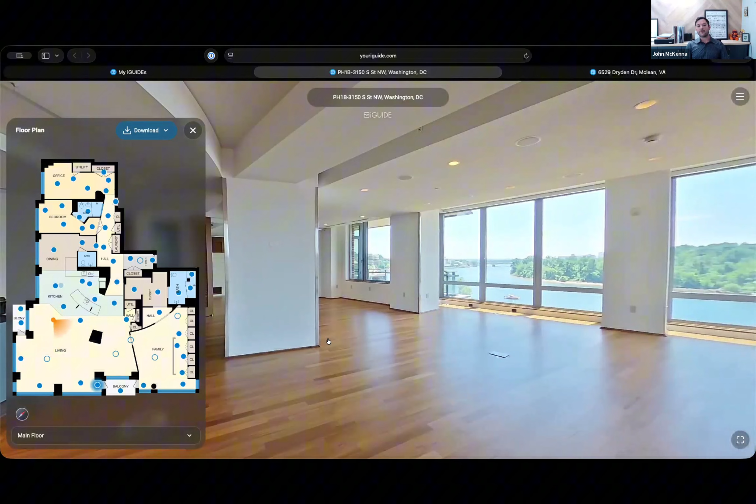Yeah, so we pretty much let everyone know up front our process. We'll get out to a job site based on our availability, and as soon as we get our initial scan package from iGuide, we share that PDF document and the iGuide link. We'll reformat everything, make it user friendly, and drop it into an email template, and let them know our follow up from there is the existing condition drawings going onto our template.

I'll switch screens here real quick, and just as an example of this project - got too many things open. Let's go to, here we go, Bluebeam.

This is the floor plan of that same model, dropped in with very little modification from what iGUIDE generates in the Revit piece, put onto our standard title block and templates. You can see, most importantly, the RCP and details we didn't have, and we'll go based on project scope from there into demolition and proposed drawings.

The existing condition drawings come in based on availability, about a week or so afterwards. We let the client know it's a great touch point for us. They see us on site, we give them the initial data from that camera, then they see our follow-up once we have the existing condition model generated. It's a way to show you're engaged and working on it as you progress through the beginning design process.

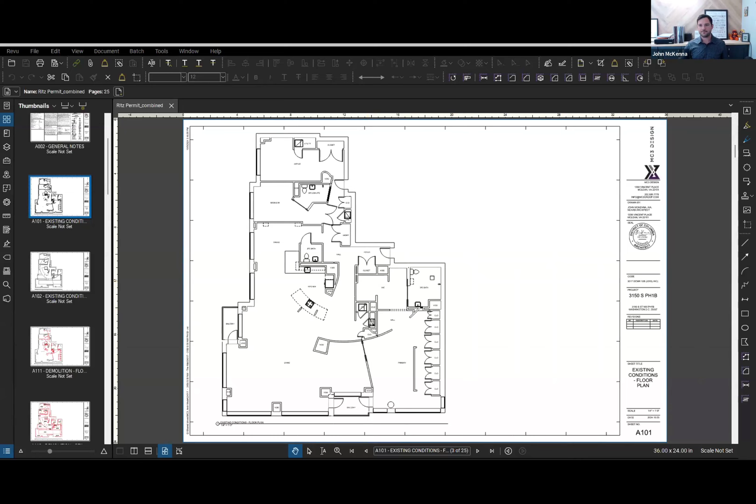Exactly, yeah, amazing. If anyone has questions, feel free to put them in the Q&A or chat. What I thought would be good next is to touch on our deliverables a little bit—essentially the variety we have in the AEC space, some details, and the level of development we use as well.

But first, John was asking about measurements or dimensions in some of your pieces, on the existing condition. That's a very good question, based on jurisdiction. We're in the DC area, so DOB is notorious for some challenging pieces on accessibility, so our existing conditions do not show dimensions, only our proposed drawings do.

Mark was asking, are you producing your own Revit models, or do you use ours as a starting point? Correct, yes—we get the generic walls and pieces from iGUIDE, populate that into our own Revit template, and manipulate from there. Depending on project scope, we may start at a schematic design level simply using the iGUIDE model, but as we develop floor assemblies, families and systems, our standard template takes over from there.

And maybe one last question from Bernard before we move on: what's the greatest challenge using iGUIDE and how do you adjust for that? That's a good question.

Limitations would be line of sight—you pretty much have to be able to access an area to scan and model it, same as manually measuring. But if you're building a model off of it, I'm not often the one on site scanning it, so if I'm drawing it afterwards, I need to be aware of what was scanned and what wasn't, and how to fill in those blanks. The LiDAR isn't going to capture something behind a door, or if there's a locked area, we need to be aware of that.

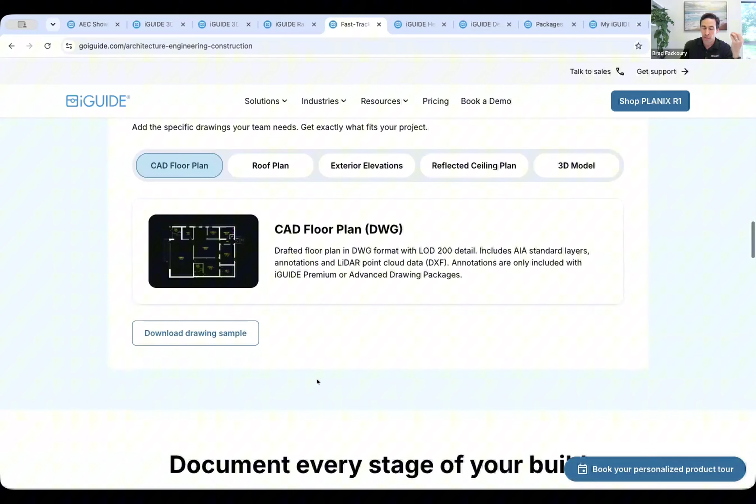And then, of course, some of the different deliverables we have, and you can always download samples. So if you're working with a customer and want to understand the fidelity of the models we provide, you can go in there, grab the samples, use them or share them with your customer. There's different things all across that you can go to, so I wanted to highlight that.

The other thing I wanted to highlight is our help desk. Here you'll find things on SLAs or delivery times, information on pricing, and information on our packages and add-ons. So this goes into the nitty-gritty.

If I click on CAD floor plans, it highlights the different things that are included and not included. But most of our advanced deliverables also have what we call a drafting standards doc. If I click on that, it goes into the nitty-gritty of what is included and not included on each of those more advanced deliverables. So if you really want to get into it, that's a really good place to look. But I wanted to start by showcasing that stuff.

So SLAs are on there, pricing is on there, and I do want to share some slides I put together, or borrowed from Roman here. Thank you, Roman. A couple overview pieces that I thought were good to talk to.

So first, just what we're offering: the full deliverable suite. As John highlighted, there's different things for different purposes. He's going for the RCP and the Revit model, but depending on your process or your customers' needs, I kind of see two different types of customers from our perspective. One, someone like John who is using the deliverables himself in his workflow, ordering what he needs to complete his process, getting to various degrees depending on the need of that project and how far he wants us to help him get.

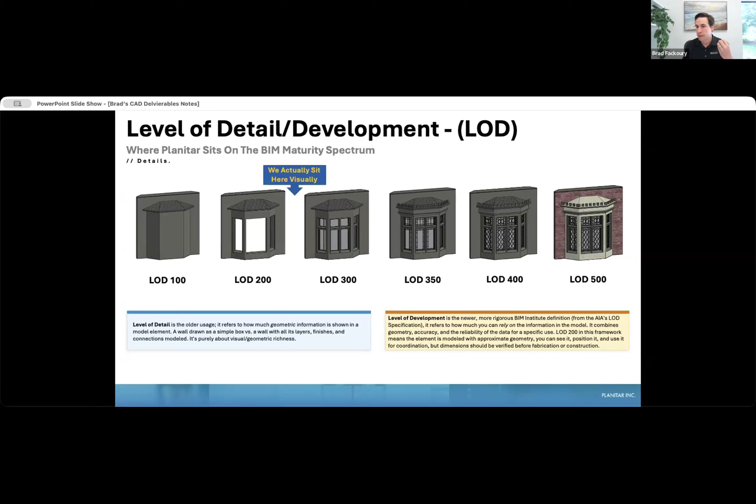So we say we're LOD 200. We're a bit higher than that on some of the things that we do. But for people who are newer, really what that means is it's modeled with approximate geometry. You can see it, position it, use it, and build off of it. But it is not something that is ideal for fabrication or construction. You should always independently verify some of those dimensions if you're going to cut granite, or order windows, or whatever it may be.

Just talking to that quickly, some of the things you aren't getting, which is a good highlight, are the wall assemblies, the insulation, the material specs aren't included. Structural beams, joists, MEP routing is a common question that we get, but we don't include that in any of our drawings. But we give you everything that you need, the window and door types, the size and placement, the ceiling types, and callouts like that. I think that's one of the biggest questions that we get often, and it's really important to talk to.

Real quick on what's not included, the MEP in particular, we've created our own standard of tags. We go through and ensure that our MEP does not actually go on site anymore. They use our scan, and we take detailed photographs of the electrical panel, any tags that are visible on furnaces, any MEP systems, and we tag those in our scans. Obviously the scan is not giving you pipe sizing, but if you're taking accurate photos, most of this can be done, as well as the beams, where we're taking calipers with a photo of any of our steel dimensions that are visible, just to ensure we can avoid even sending our subs out with a detailed initial scan.

So you're really leveraging it in different ways just to save time, and kind of get you further into that process. I'm just trying to scan through some of the questions here.

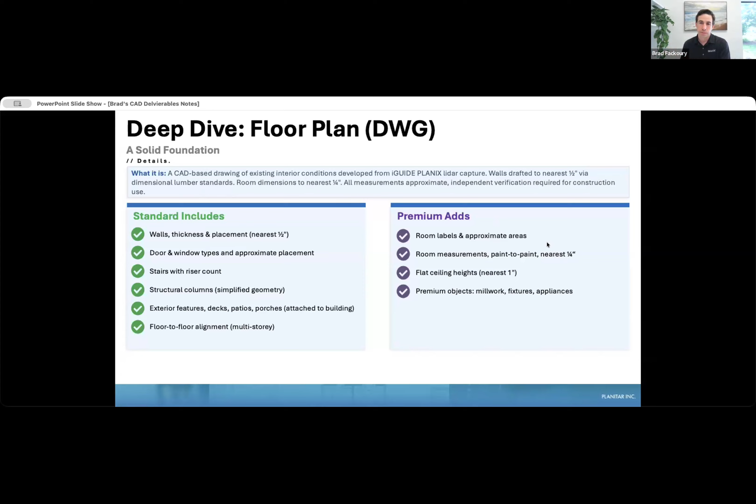One other thing on the 3D model: one of the biggest areas of questions or wish list items is complex ceilings. That would be a massive time saver if you have a complex architectural ceiling, whether it's domed or curved or has a bunch of beams or millwork. We don't draft complex ceilings. If you're capturing with the PLANIX device and getting LiDAR, it's all mapped and available, so you could get spacings and heights through the point cloud data. If you open that up in AutoCAD, that's a great place to go. But our 3D model really is that starting point or springboard into the process, a good place to start getting down that path.

We often get asked about how it works with other platforms. So we can output in Revit. It's native in Revit, all the layerings will work as expected. AIA layering and naming conventions is what we use.

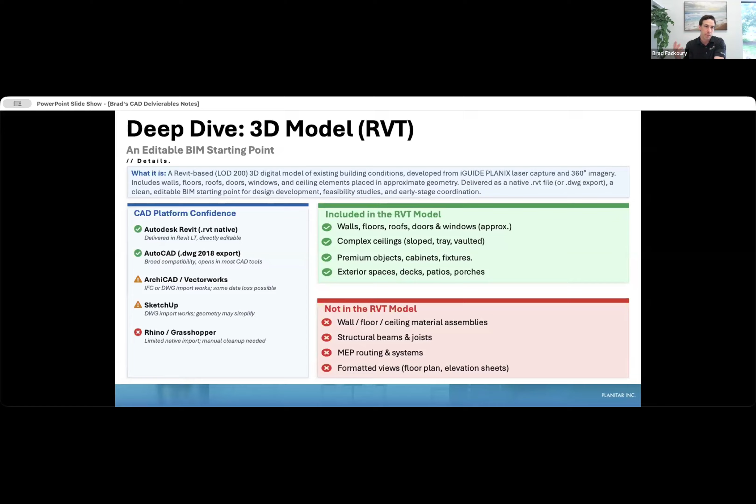And we also make sure when you get a DWG that it's working in CAD as well, in AutoCAD. Some of the other platforms can open DWGs, but sometimes you can lose the fidelity in the layers that we create. And sometimes I know for DesignFlex 2020 or Syncly, when you import the DWG, it's just a flat image and you then have to draw on top. So depending on the platform, you may have some limitations, but it is DWG and it should be imported into a variety of different tools along the way.

So I'll maybe stop after this slide, and then we can get into some of the nitty-gritty details or some of the questions you guys have. Just the advanced drawing package and what's included in that. It's pretty comprehensive. It's designed for someone who needs to pass it off to their customer along the way. It's a comprehensive package. It includes the CAD floor plans.

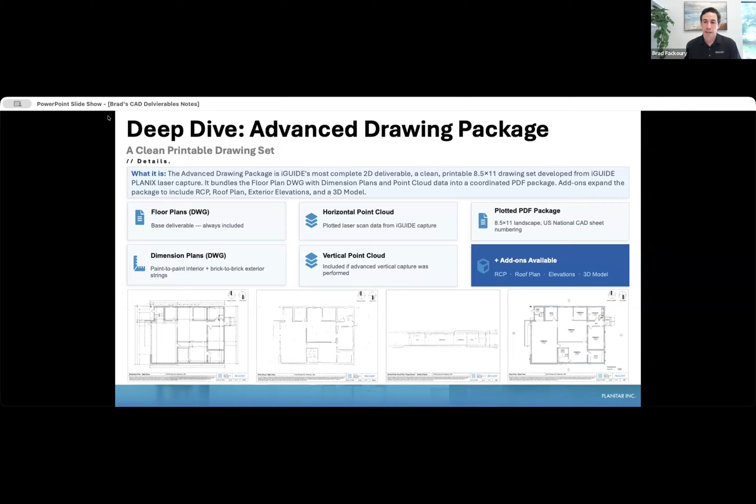It includes the raw point cloud data, both horizontal and vertical. So if you're capturing vertical data or elevation data, that's all included. It includes the dimension plan, and then of course the full plotted package, which is 8.5 by 11 plotted drawing package, which includes all the deliverables, the dimension plan, and the point cloud elevation plan to get you going. Hopefully that's clear.

So going through some of the questions, Misha, I'm trying to look to anyone else. So we got some of that difference between premium and standard packages. Architectural firms that do not have Revit capabilities or even 3D capabilities, but would like to have 2D interior elevations. So that is a really great question. We don't offer interior elevation drawings. It's something we've considered in the past from your application.

We also have people who work in commercial spaces that are doing decals, where that interior elevation helps them build on top of that. So it's on our list of things to consider and things to expand into. But we can always unpack that and see how we can help you along the way. In your case, I would say a 3D model gives you everything you need because then you can export those views on the inside. But that could be higher fidelity than what you're looking for.

So PDF scale is set. Order PDF to scale without ordering the DWG. So that's one thing to talk to about the iGUIDE schematic floor plan drawing in PDF and a DWG package. So the DWG goes through a more rigorous process compared to what you're getting from a PDF output. So the DWG is a bit more robust, it's more accurate, and it's designed to have floor to floor alignment. I think that's a really critical part.

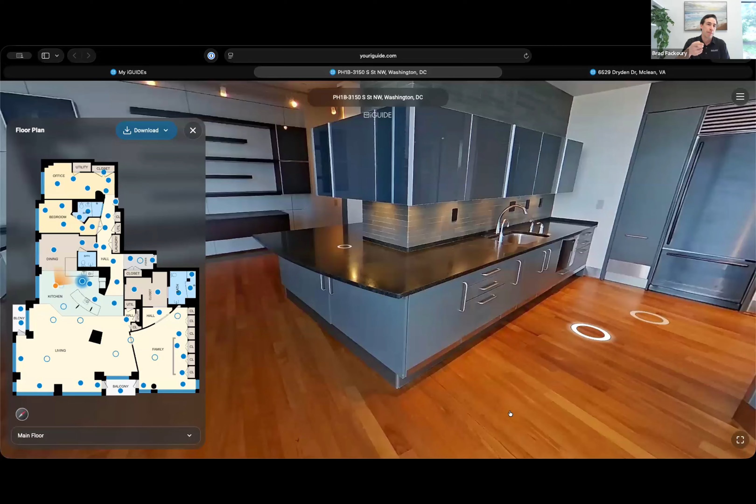Yeah, so I think that's good context. Knowing what it's going to be used for downstream, knowing that that has to be dimensioned and modeled in some way, shape, or form. So you made sure you got LiDAR to hit that. So I think that's a good practice is knowing the use case downstream. So if you're a capture pro who's documenting for someone else, knowing what they're using it for and what information is important to them, you could do the same things. And I would go up and down for the uppers and lower cabinets here as I'm always changing my height, and I think that's what we're seeing here.

Yep, and as you mentioned with granite, this curve itself on the actual countertop is not captured. To me, that was not a critical piece. So it's not something that we focused on. I think that would be one of the more challenging things to try and capture. But to me, I wanted the structure. I wanted to make sure that I showed where this post was. I wanted to show how it tied into the countertop as well. There's my carry case next to it as well. But we captured all of that information and made sure that we had multiple views to be able to get visual accuracy on all of the intricate ceiling details and trays that are dropping out. Yeah.

Okay, just a couple more questions here. John, when do you use vertical, or not you, John, but John D online, when do you use vertical scans? Great question, and it's something we wanted to touch on here. So vertical scans give us accurate elevation data. It's a building slice or a profile of a room or a feature or of a building.

So that's when you turn your Planix camera, and I should have had one here. I'm surprised I don't. On its side, so the LiDAR, instead of doing the floor plan and interacting with the walls, you turn it 90 degrees and perpendicular to the floor. And then the LiDAR is interacting with the ceiling, the walls, and the floor in an accurate way.

So we use those to build 3D models. We use them for getting all the height and elevation data of each room. We use it on the exteriors to give us the height of each floor and the windows and the ceiling and the roof lines. So that helps us create elevation data.

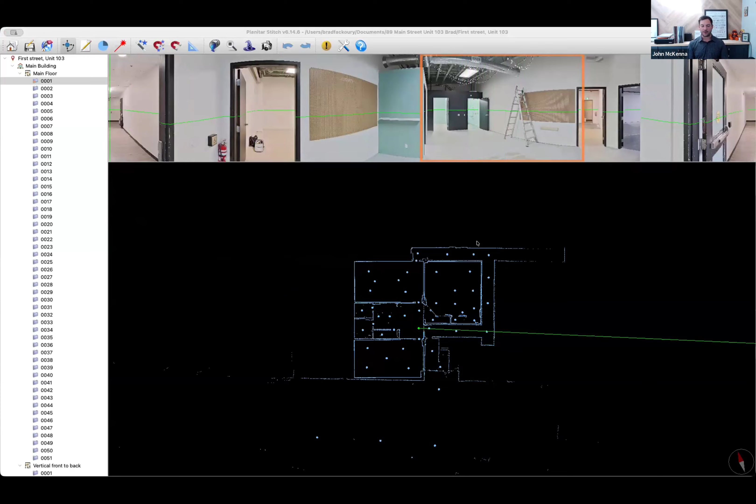going up to front porches. We'll even use it for basic elevation changes. We're not actually doing a topo scan off this, but we can get some idea of what our vertical change is by doing a vertical scan and just internally doing a point-to-point measurement.

Yeah. Hopefully everyone can see my screen. I just want to show what that looks like in practice. So this is a small commercial space. This is the floor plan that we drafted. As you can see, it has an open ceiling up top with joists. What we did then is create vertical scans front to back and side to side.

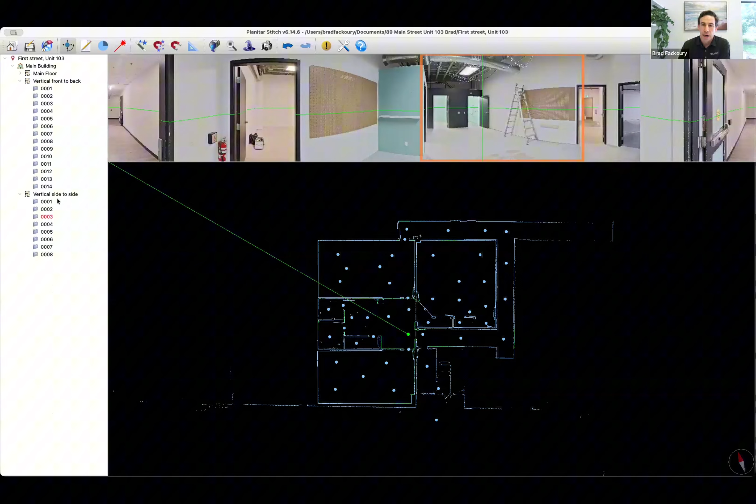So one of the profiles went up here from this hallway. You can see through the door there, all the way through to the back of the building, and the other sliced it side to side. So when I go through that, this is actually the outcome, and this is what John's data probably would have looked like as well.

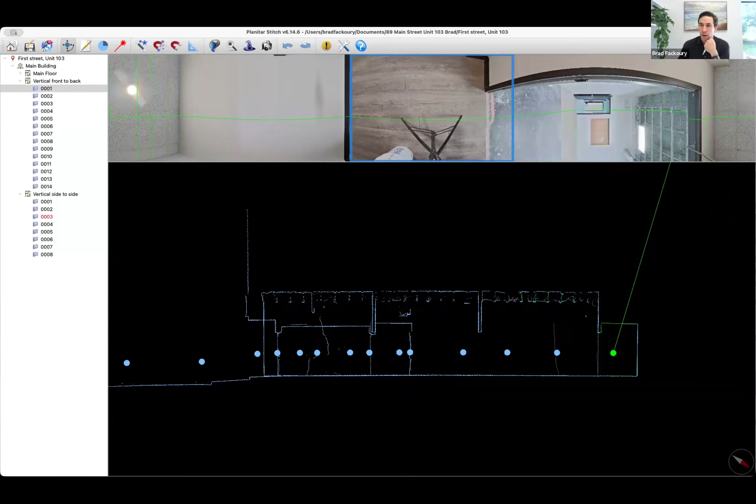So here I'm out in the hallway of the building. I'm hitting the short little drop ceiling there. I'm then going through the doorway, and you can see how that drops down, hits the doorway, and then up to the joist. I can see that each member is articulated here, so I can get underside of joist and the underside of deck height.

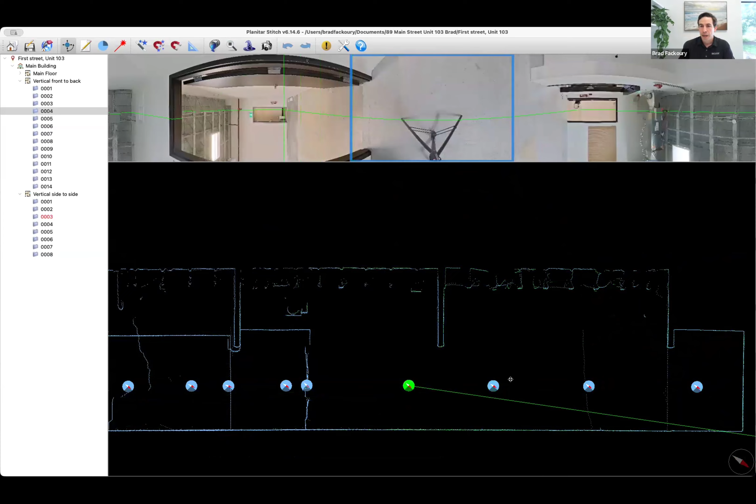And you can see that as I work my way through that building, I just did a straight line through. You can see straight through all the doors. It's actually capturing all of that elevation data. And that's what our drafting team uses to build out the 3D models. And if you organize it like this in Stitch, you'll actually get this vertical point cloud data that you can then do some dimensions off of.

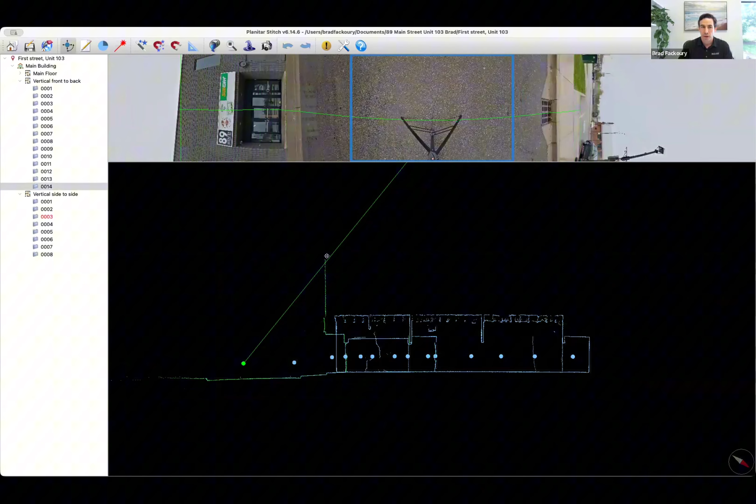And in this particular case, I went right outside. So I went outside, got the door, got the signage, got that height of the building, and worked my way all the way through. So just to articulate, it is hard to see at first, but when you see it all come together and you can see how it actually builds that building slice or the floor plan in the vertical section, you can see the value that that brings.

That's cool. I've never considered the value of the straight line that comes in there. That's learning for our end too.

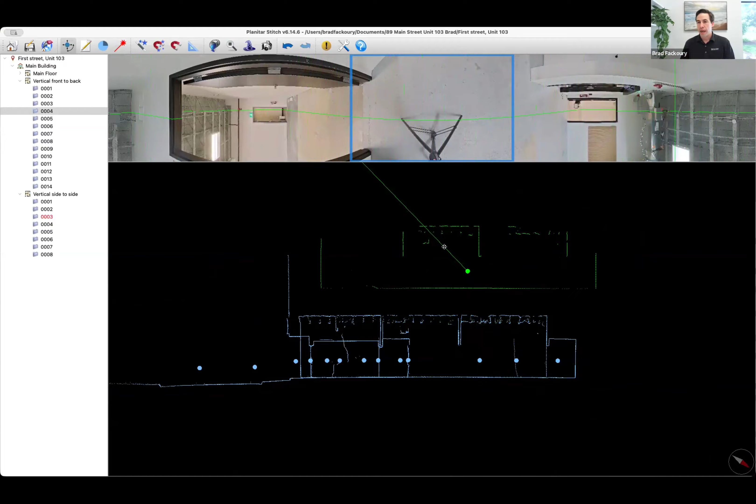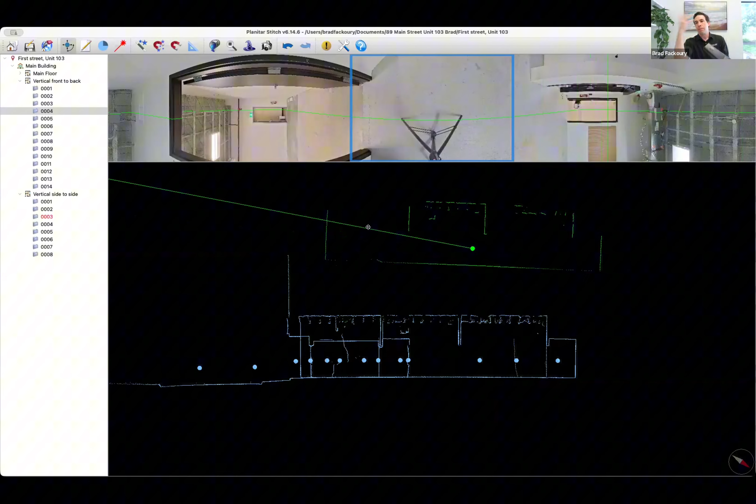This is the scan out. If I would have flipped the orientation of my camera, essentially it just mirrors that on the vertical axis, so it wouldn't be flipped this way. That would be if you tilted the camera from here to here — it flips it from right side up to upside down. But if you turn it from here to here as you're scanning through that pass, it actually is just flipping the image, so the staircase would appear in the other direction. It's hard to articulate, but I'm happy to show you in practice what that looks like.

So if that was hard — the vertical scans are done when the unit is on its side. The reason we do that is because the LiDAR is in the middle; when we do it like this, it interacts with the ceiling and the floor, and you want to go in the same orientation as you work through your building. You do not want to capture this way, then flip the tripod over, capture this way, and then capture this way, as that flips and flops the LiDAR data.

Yeah, so a couple more minutes here. Leroy, haven't heard of you before. No, I'm just kidding, welcome.

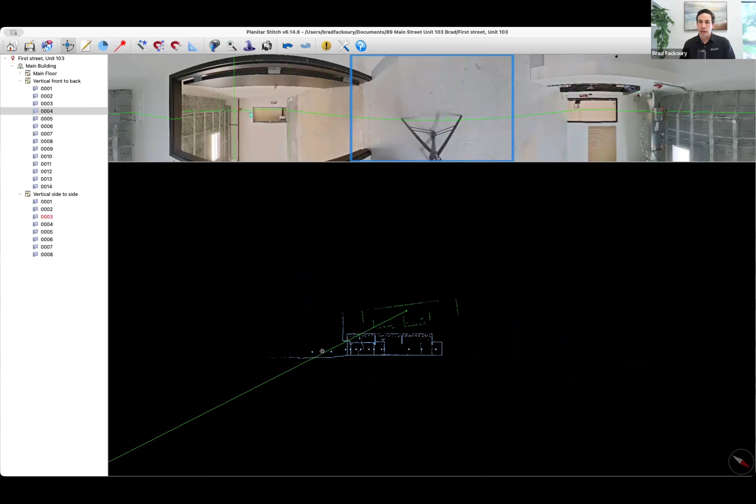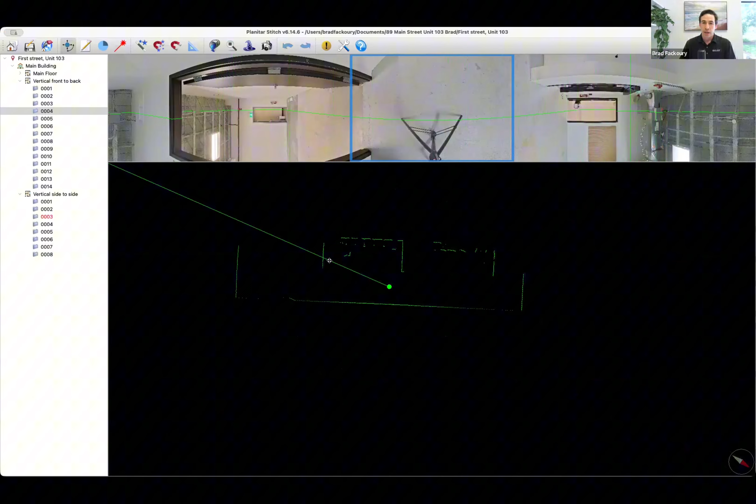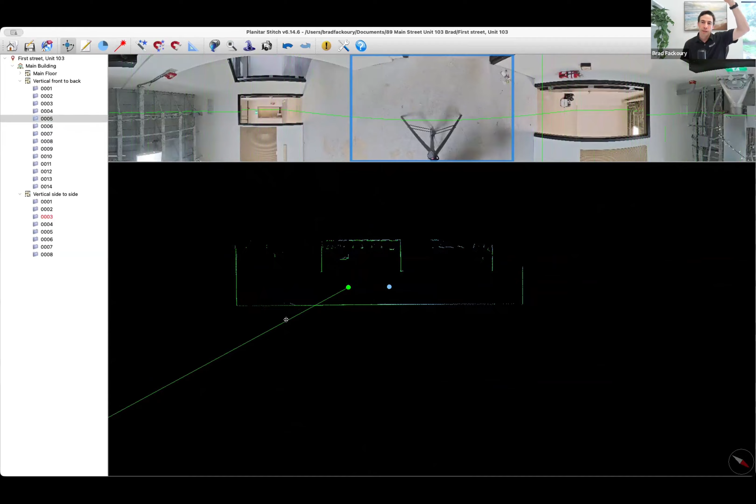Could Survey and Stitch be updated so the views of vertical scans are rotated, making it easier to view? Great question. I'll use Stitch to articulate it. What Leroy is saying is typical: when you take your first scan vertically, same with your floor plan, the orientation could be all messed up, just off like that. What I always do is align my first scan, and now the data acquisition team allows you to rotate all scans, which is amazing, but I always do it off the first. I orientate it so the ground is always down and the roof is always up. That way as I build my next scans, it's easier for me to visualize what that looks like. I have other scans pulling it down, so it's building and I can see where I'm going. I can see the floor is flat, and it helps me see what I've captured in the ceiling. So I'd always coach: align that first scan, floor always down, ceiling always up. Then as you build, it's a lot easier to see what's going on.

Is the accuracy the same if I order a Radix and then use the same file to order a drafted plan later? That's a really good question. When we draft a Radix, it's exactly as you sent it to us. I couldn't tell you the accuracy behind that, it's accurate to what's submitted. But when you upgrade or update it, our team will be fine-tuning the alignment to make sure everything is the best possible outcome. So it could be different than what you're seeing in your point cloud data.

Is there a way to send the iGUIDE scan to different trade partners without them having to make an account and view it? Great question. It can be protected or not, and you can make it public or not. When you order an iGUIDE under the AEC industry, no matter what, it's not indexable or searchable through Google. If you use RRE, it's public, we use the address as the URL and it's searchable for a reason, because that's the use case of the residential real estate concept. But when you're using construction or insurance, we actually use an alphanumeric string. It's not indexable, it's not searchable, and unless they have the link it's really hard for them to find that. So what happens, and why other people can't view it, is it might be protected. If you have a protected iGUIDE, it requires you to put their email in, they have to log in to view it. If you take that protection off and share it, anyone can open it. So if you're passing it around in an email, going to subs or subcontractors and sending out the link, if it's unprotected, anyone with that link can view it, and it's still not indexable or searchable by any search engines. That's a really good question, Mike. That's what we do, we turn off the protection when we share to subs, especially for bids. It's very easy that way.